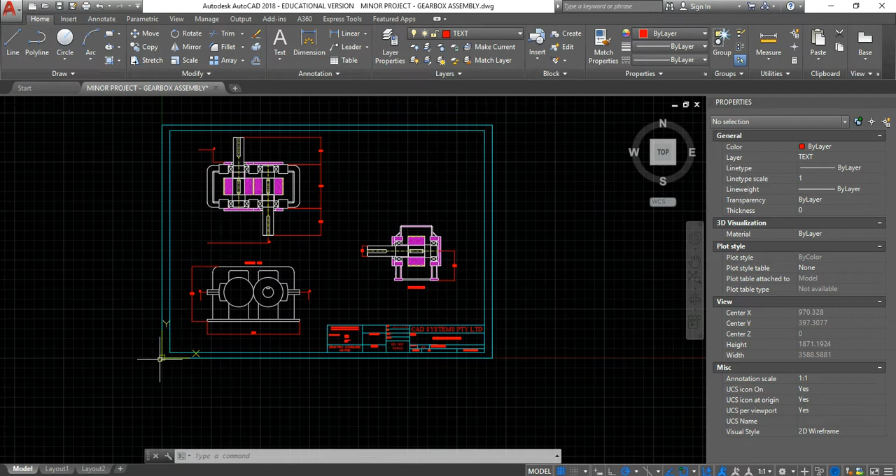In this video we'll just look at fine-tuning the dimensions in the assembly of the gearbox, minor project for AutoCAD. Now this drawing is done on an A3 sheet at a scale of 1 to 4. It's actually been done by scaling the sheet up 4 times so that when it's plotted out it would be plotted a quarter size, which will make it a scale of 1 to 4. The drawing is always done full size.

This creates a problem with the dimensions because, as you can see from this dimension, the arrows are very small. The text is actually a reasonable size, but that's because it's been adjusted and set to have a text height of 10. Normally that would be 2.5. I'm going to just change that back to 2.5. Now what we really need to do is change the setting for this dimension style so that it scales up by a factor of 4.

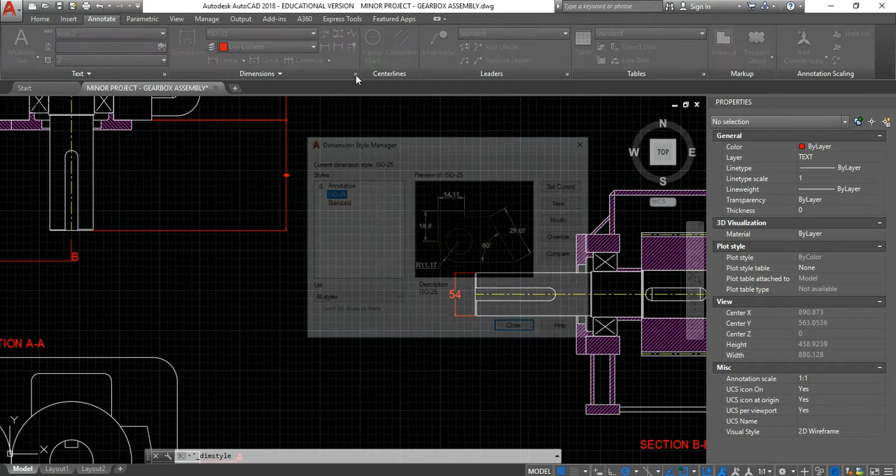So I'm going to the Annotate tab, the Dimension panel, and selecting the Dimension Style Manager. ISO 25 is the style that we're using, and we're going to modify that. Note the text height is right, the arrowhead size is right. Just one other thing on the text before we do the adjustment of the scale. Normally with AS 1100 we view the text from the bottom or the right hand side of the drawing, so we normally align the text with the dimension line.

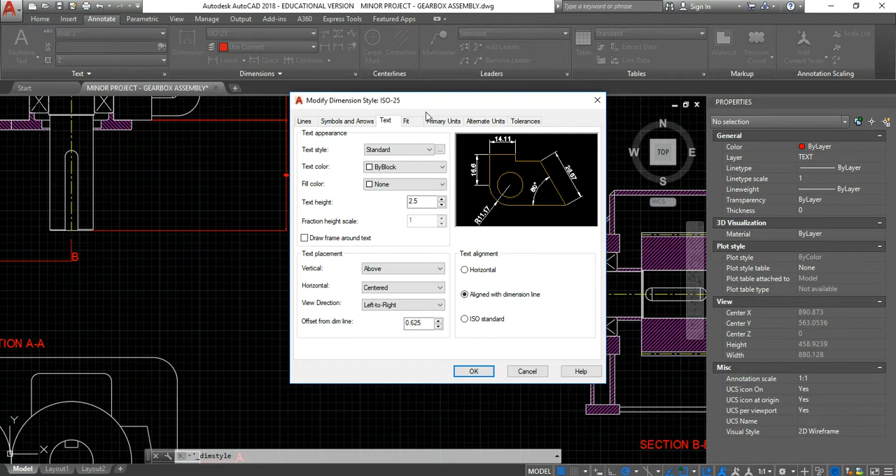Now on the Fit tab, if we use a scale factor, and because we're drawing at 1 to 4, if we make this 4 times the scale, what that will do is make our text bigger and our arrows bigger. Now you'll notice that that hasn't adjusted automatically. Pretty annoying, but you get that.

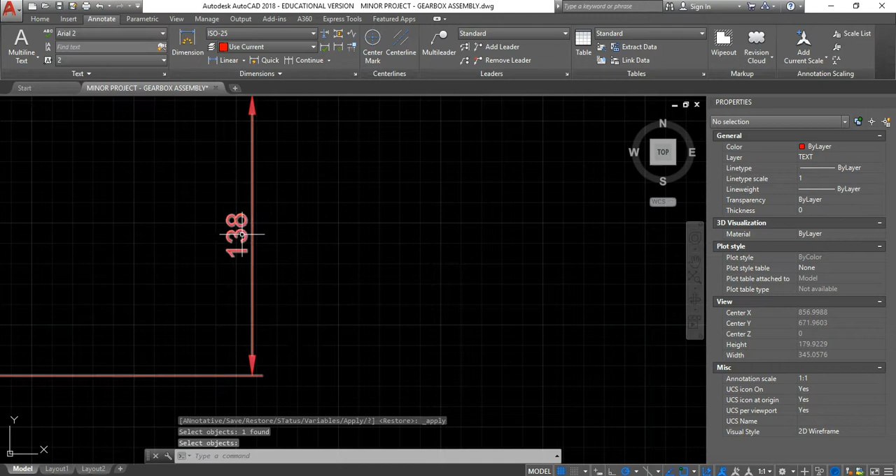What we have to do is go to the manual update on the dimension panel once again, update, select that dimension, press enter, and you'll see that the arrows and the text have been scaled up by 4 times, and that's about the right size. Now the other dimensions haven't been affected.

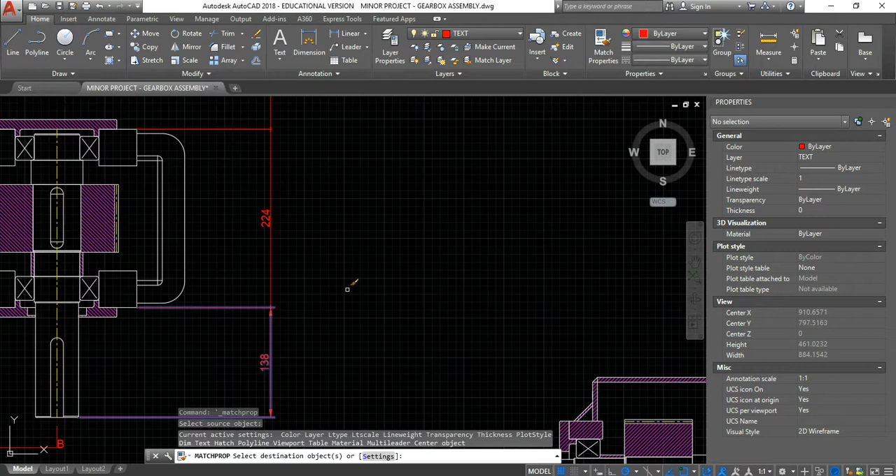What we can do there is go to our home panel, match properties, select the one that we've just adjusted and paint those properties onto the other dimensions in the job. So if you look carefully you can see that that is actually adjusting all of the sizes as we go.